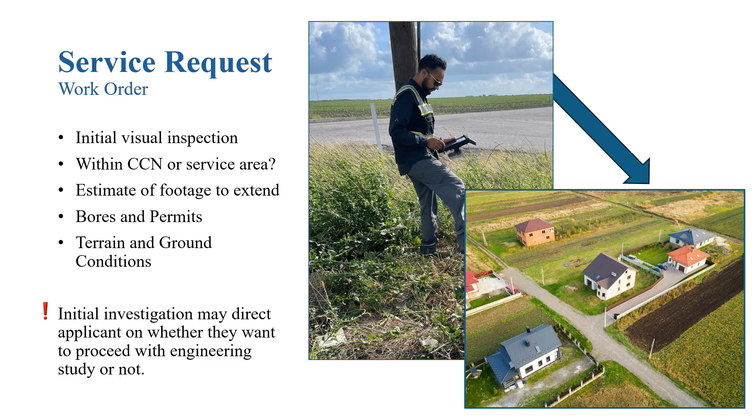Again, standard or non-standard, have someone go out. You can kick off kind of the riffraff right at the beginning. If you're going out there and you find out that it has nothing to do with your area, you don't service this area, that may be able to deter people right off the bat. If you know that you don't have a line within miles, and you let them know that it's going to take 2 miles of pipeline to get that, and I don't know a cost, but I can tell you it's going to be expensive.

So there could be just some initial thoughts and some investigation processes to give the information. Is it going to be a road bore? What kind of highways are we going under? Is there going to be TxDOT permits? So you're looking at all the conditions.

Your operator can go out there and give basic information of what you're going to start working with, and possibly give a developer, is it worth it or not? And if they want to continue, that's fine, but you give them some basics.

And then you work for the checklist, and that gives all the applicant information, who you're working with. In case you didn't know, not always is the developer the same person as the landowner. The landowner may own the 1,000 acres. The developer is someone they hired to make the profit out of it. So you need to make sure who you're talking to, who has the responsibility to answer the questions that you're going to need, who's signing off on the check when it comes down to that time.

So making sure you're getting all the applicable information. Your service area verification, you know it's in your CCN. We'll talk about a little bit more of that in the next slide. But the engineering investigation, the compliance as far as in your counties, and we'll get into some of those details as well. This checklist has a variety of things to consider when a developer comes in.

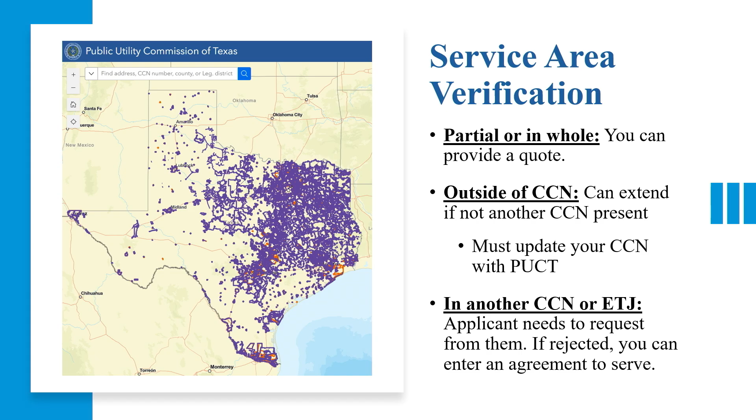But this is a good spot to where you have your engineer get involved. You don't want to do all this by yourself. There's a lot of boxes to check. There's a lot of things to verify. Getting your parcel information. So once you're finding out which piece of property they're actually going to work on, you need a 911, a physical address. Where's this piece going to be?

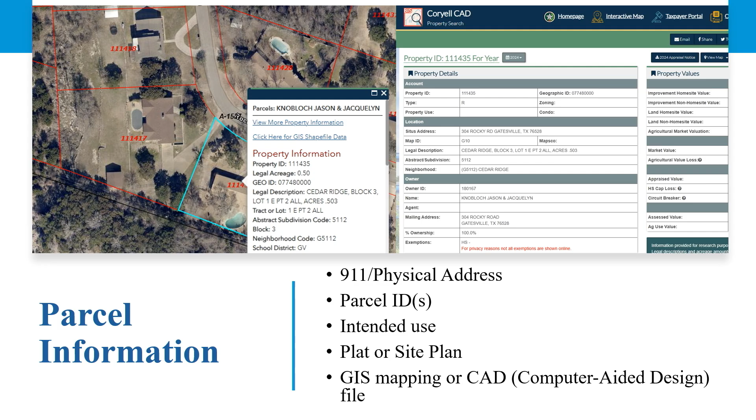But what is the intended use of that property going to be? Is it going to be a water park? Is it going to be one facility and it's all ranch land? Are they dividing it into a 3,000 lot subdivision? They have to be able to give you that intended use, and that's part of the service agreement. If they change that, then there is a breach of contract, so to speak.

If they're telling you, I'm only putting in 10 houses, and then they build or plat something for 100, you weren't prepared for that. You didn't quote for that. So all the information needs to be correct on what their intended use was.

Having a plat or a site plan, a lot of counties now are getting involved, which I'm glad to see to an extent. The county that I live in actually just a couple of years ago started getting involved with developers coming in. They wanted to see that there's actually going to be water servicing in that area, because some of you may unfortunately have had some situations, people buying from out of state, buying land sight unseen, come out here to find out that there's not water available anywhere. There's even been houses built. So since then, a lot of things have changed.

Counties got involved. There's now legislation that it has to be shown that there's water available. But a lot of counties are making utilities sign off that there is at least water available. I see a lot of counties still working out the details of how that's supposed to pan out, because a lot of them are actually wanting the utility to go ahead and say that they can service so many up to so many years. And you can't really commit to that. If something else happens, that's taken away from your capacity.

So there's still some juggling going on, but a lot of the counties are getting more involved with working with utilities to make sure that the plat is something that they can service and that you can service with water.

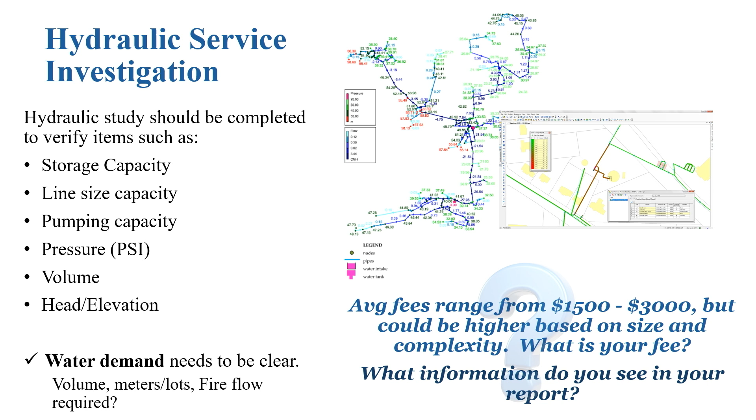But average fees, I have seen anywhere from $1,500. I've seen some that are $5,000 for engineering fees. Anyone higher than that? No? Okay. So they range, and it depends. A lot of these engineers are actually saying they're about 8 to 10 weeks out of being able to get an engineering study done. So there's a timeline you have to work with to be able to get an answer back to a developer. But it's well worth it.

You need to have the engineer to verify. And then that is your backup. You're not just being the mean guy to say it's going to cost this developer $500,000. It is some kind of documentation that they've done some analysis. There's been too many times we've seen a lot of rural systems say that we don't want to see growth, so we're going to say that it's $2 million. You can't justify that. Don't do that. That's why we have these terrible legislation years where it's 900 water bills. It's because we do stuff like that. So use an engineer, have some justification for what your reasoning and your costs are going to be.

Capital investment fees, I've seen this go a couple different ways. So again, utilities don't want to see growth in the area. They will try to charge every drop of it to a developer. And in a lot of cases, that's how it should be. If they're going to bring it in, if they're going to put an impact on you, by all means, they should pay for every bit of it. There are some cases where you can kind of weigh out the differences of what they're going to bring to the table versus what you're going to get from it in the end.

So if they're building off-site facilities, if they're going to give you a 1 million gallon storage tank and 2 new wells, and then also give you 1,000 customers, and they're providing all of this for you at their cost, there are some opportunities to kind of weigh out the differences. Maybe you don't charge them the capital improvement fees. Maybe you do waive some of the impact. And there's ways the engineers can offset that. So if they've spent $200,000 in off-site investments, maybe you take that from what the capital investment fees were going to equal, and then they pay the difference of it.

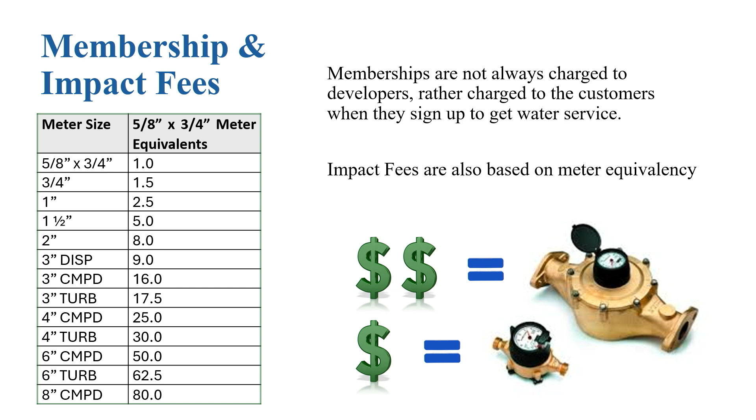And then whenever you're developing or you're putting together these impact fees, make sure you're going by the meter equivalency. We still see that today just in rate setting, which is somewhat frustrating. If you have a 2-inch compound meter that's servicing a jail and they're paying $30 a month, just like Ms. Smith is for her residential meter, that's not how that works. You are losing money. They should be paying a commercial rate. A 2-inch meter is worth 8 connections. So it should be 8 times 30 is the base rate for the large meter.

So if you don't know how that structure goes with your rates and you want some more information, by all means, please come talk to us. We'd love to come talk to you about rates and making sure that you're getting what you're supposed to be getting, because in those cases, the ones that are using the least amount of water are covering the ones that use the most. So be sure that you're doing it based on the equivalency rate.

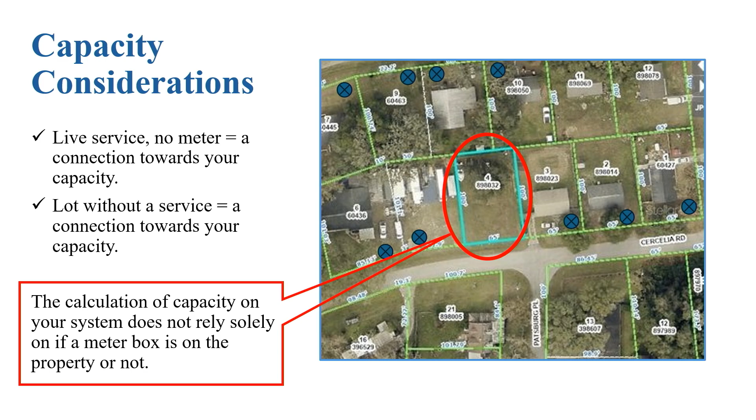Capacity considerations. I have only really seen this in RV parks when that was a big situation a couple years ago. But whenever there is open lots, whenever there is a plat development and you have 100 spots, the capacity is probably going to be looked at, and TCEQ's all in the room, so they can correct me and throw stuff at me if they'd like to. But I think the way it's viewed is that they know that there is capacity there. You have to have the capacity to serve that lot when a house shows up.

So it doesn't mean that a meter box has to be on it. That's an available spot for a meter box or a connection. So that can be counted. At least that's kind of the view of the RV parks or even marinas in some cases. They're going to count each one of those slips as a connection. So that's what they're going to base that rate off of or that meter size off of. So just keep that in mind.

So TCEQ, there are certain situations where you have to give notification to TCEQ. These are all in the 290.39. So changes that increase or decrease production, treatment, storage capacity, any capacities to your system, changes to the disinfection process, if you're a surface or a GUI plant, changes to the disinfection type. So if you're going from UV to RO to whatever the case may be, any disinfection type, you have to give notification and approval. When I say notification, that means also with approval. And then changes in the existing distribution system.

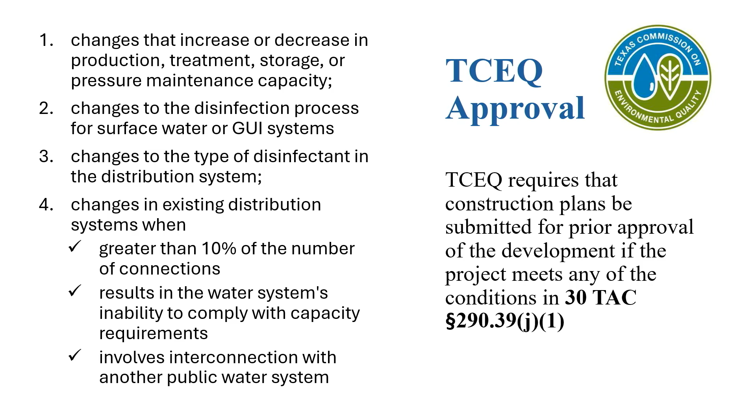So if you're increasing more than 10% the number of connections, in most cases these developers are doing every bit of that, if not more. If it results in the water system's inability to comply with compliance or capacity, so by adding this, if it puts you under your rates or over that 85%, there has to be approval for this. And of course, if it involves the interconnection with another utility. So it's not every situation that when a developer comes in that you're going to have to go through TCEQ to get approval, but there are quite a few considerations. And again, using an engineer, they know that. So lean on them. If you don't have an engineer, there's a lot downstairs, I think. So go find one.

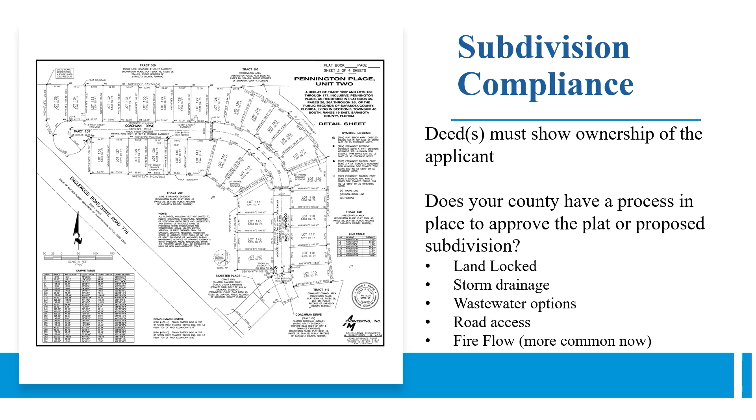Subdivision compliance, I touched on this a little bit with the counties. The counties are working better now to make sure that the deeds are compliant, what they're going to develop is compliant. There's actually space for the septic systems going in. Is there going to be ingress, egress? Is it landlocked, storm drainage? All of those things are considered, but they also want to know that you can provide them water.

This is a touchy subject with some of the developments in some of the counties. I'll speak to the county I live in. There was a big situation with not wanting to use a water system that was in the area, serving that area, and instead they were going to do 10-acre tracts, and each one of them were going to have a well, and it was going to be 580 wells.

So it seems like an okay way or a loophole to get around having to use a utility. Each one is private wells. It's all private landowners. They have their own little water system. It sounds great, until you start considering that's 500 and something holes in the ground with 500 and something septic tanks right next to them; something is going to go wrong.

And it's also going to be one big drawdown, all in one 600, 700 acre tract. So it's those kind of things that you want to try to deter from. If they don't want to pay, they don't want to play right with developers in the water system, then do what you have to do. But you're trying to deter from that kind of thinking.

Easements and permits. Easements are a big deal. I used to work at a system where when I showed up, all of our easements were filed in Walmart bags in the back closet. They were not filed at the courthouse. So as long as they got a signature, they thought they were done. We had to go back through for years trying to get people to re-sign.

And if you ever had to get someone to re-sign a document, it's almost impossible. And there's nothing you can do to force them to do it. They already have service. So, if you're not filing at the courthouse, it never happened, just to let you know that. It took a lot of convincing to my board to let them understand that.

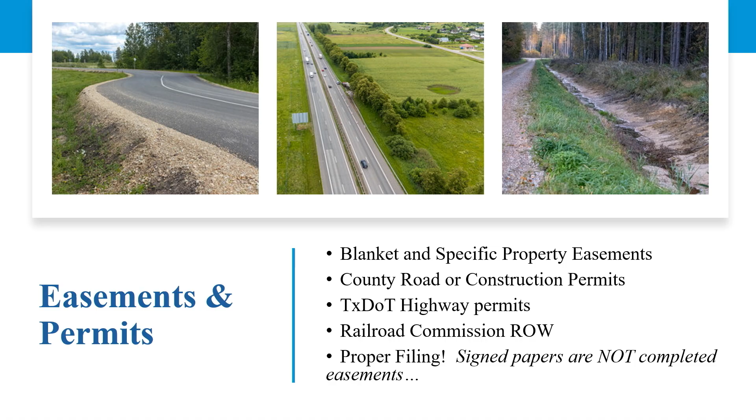All right. And then proper filing, I already said this, just making sure that it actually goes somewhere else. It doesn't just get put in a drawer somewhere. So the easements are a big part of this. Again, developers know this. They know what processes are supposed to be done. If this is their first time, that's frightening, and sometimes you can tell it's their first one. They just bought a 10-acre tract, and they think they're going to make millions because they see other people doing it. They don't know what they're getting into. So again, have some kind of consultant, engineer preferably, walking you through all these steps.

And then finalizing the application. All things considered, the engineering study has been completed. Everything looks like it's copacetic. The capacity requirements are going to be in place. They've come up with an agreement. They're going to have to build a tank, include this line. Whatever the case may be, you're finalizing the application. You're going into the board, making sure that you have board approval. This is going to be a significant increase on the utility. This is going to change some things for the customer base itself.

Also, typically, I have seen a lot of community meetings following some large developments because they want to know what that is going to do to the customers that you already serve. Is it going to impact their water supply? Is it going to impact their rates? Typically, I would say the new developer is paying for all of this. Your current customers, your current ratepayers should not be eating the cost of any of this. So that's why you got to go to the board. You got to have those conversations. And of course, you want to make sure that the plan's all laid out and there's nothing being missed.

I guess some of this doesn't apply because I know we're not all WSCs. But depending on what kind of structure you are, of course, you go out for the bidding process. There are requirements of what you have to do. If you're a WSC, you don't necessarily have to follow a lot of these steps as far as the requirements of the cost and how you do the bidding. But we always suggest that you follow the same process as we would tell the district to do. It's always just best practice. But there are limitations as far as the project cost and how you have to put out those bids.

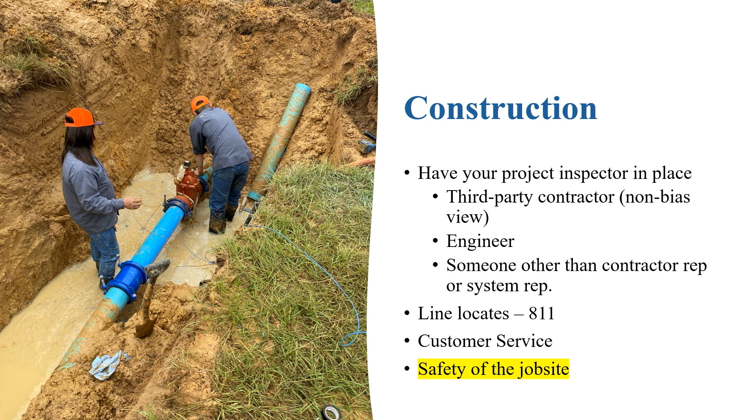I don't know if y'all have noticed the picture. Does anybody see anything wrong with it? The shoring? Okay. I was just curious if we had some operators. Is anyone picking up on that? So, great picture. They were doing a good job. I'm just glad that it was all clay and nothing caved in.

So, safety on the job site. You're not overseen by OSHA until something happens, right? And then something is going to happen as far as a utility being liable for something. So, just making sure the contractors know what they're doing.

Closing out the project, again, following up with the customers. There is going to be settling. There is going to be cleanup to do later. It's not going to be fixed as soon as they're done. People just have to understand that. It's going to take some raining. It's going to take some settling. There are going to be ditches like this.

Having a good contractor, having the warranty work, the bonds, all of that kind of stuff needs to be in place, that you have a good contractor for it. That way they do have scheduled cleanups, they do have a sign-off sheet once certain parts of the project are completed and they are defined as, I guess, administratively complete. So all the paperwork is done, and then all the finished product is done. Your engineer can sign off that they can get paid for that portion, or by the whole project based on how the contract is structured.

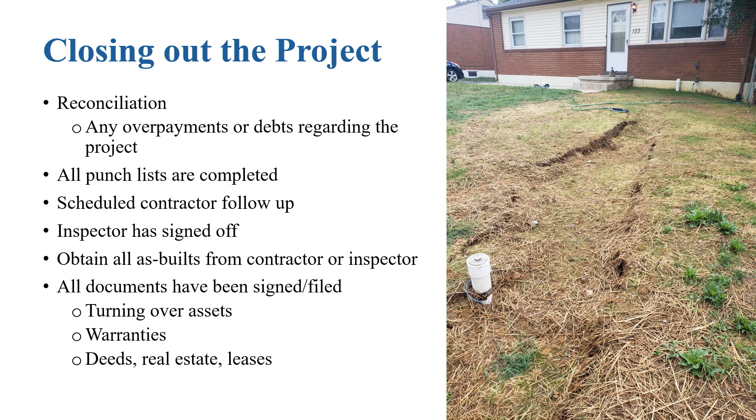If it's something large, typically it is phases, so you know that you can try to schedule and coordinate capacity. If they hit it all at one time and you add 1,000 customers overnight, that's going to create a problem. So just looking at your non-standard service agreement, making sure everyone is in agreement, the board, the engineer, and the developer.

Looking for fire flow, that is a big thing nowadays. I don't know who all has gotten involved with that, but even in the rural areas, the counties with their, I guess, plat approvals, they're wanting to have fire flow. And we've been to a few different meetings, county commissioner meetings, to try to explain, as necessary as that may seem, and I understand completely the purpose of it, our business is to provide potable drinking water, first and foremost. And then we can do fire flow as long as the capacity is there and as long as someone's willing to pay for it. So just looking through all of that, making sure all the T's are crossed, I's are dotted, so to speak.